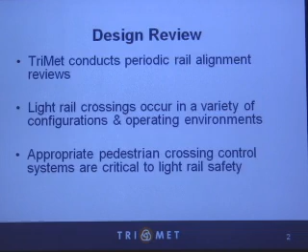And we've also learned quite a bit over the years as to what appears to work and what doesn't appear to work so well. So with that, there are really four design principles that we have to keep in mind. One is to respect the urban environment. What this really means is maintaining the existing travel patterns to the extent possible. So we study that. Secondly, it's to comply with pedestrian and light rail operator expectancies.

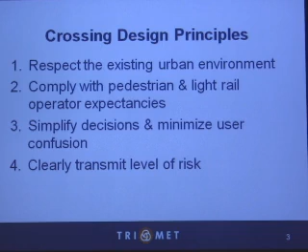What does that mean? That means really assessing what are the pedestrian behaviors, what would we expect them to do, how do we expect them to behave, and then to simplify decisions and minimize user confusion, and then lastly to transmit the level of risk. Is it safe to cross?

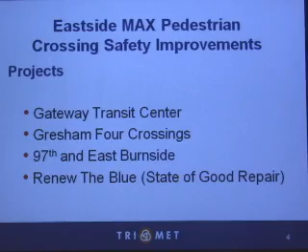With those principles in mind, we looked at four key areas along the east side alignment. We looked at the Gateway Transit Center and Gresham. There are four crossings in Gresham that we looked at. We also looked at 97th and East Burnside. And then as a much larger effort, the Renew the Blue State of Good Repair project.

First, I'd like to give you an overview of the Gateway Transit Center. As you probably know, Gateway is the busiest transit stop that we have within the alignment. It serves about 2.5 million boardings annually. That's because we have multiple bus routes along this line. There are 3 MAX lines that converge at the station. There's a large clinic, a large shopping center just across from the transit center, a very large park and ride. And then there's the ODOT multi-use path along the alignment.

And all of these facilities serve to provide daily travel around the Gateway area. So with that in mind, what improvements were we looking at? First of all, we were looking at channeling pedestrians and cyclists at the Gateway Center into a predictable pathway, improve ADA accessibility, improve pedestrian awareness at crossing locations, provide better cues to identify pedestrian intent at a crossing. This is for the benefit of the rail operators and the bus operators.

And then to improve security by fencing off a very large area where there was quite a bit of trespass into the trackway or across the bus travelways.

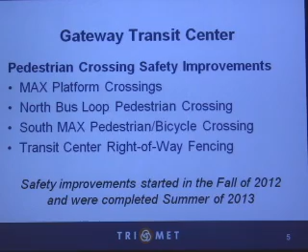So what I will be doing now is providing you with a series of photos, because I think that's really the best way to illustrate what those improvements are. Also, keep in mind that some of these improvements are still underway. We have not completed all of these projects.

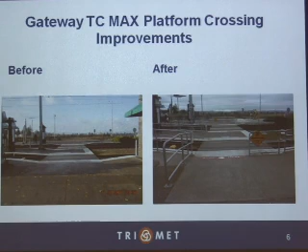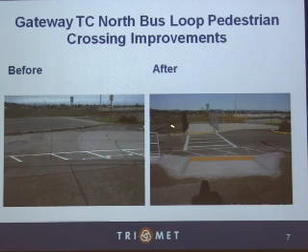Again, the attempt is to try and channel pedestrians and guide them in the direction that we wish them to go. And in this area also, bus traffic is one way. So with this orientation, they would be tending to look to the left, they being the pedestrians.

Public has a question. How long was it like this before it became that? Several years. How many is several?

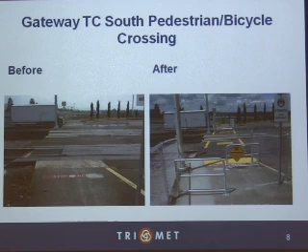point of development. Thank you, appreciate your comment, but maybe you could hold comments till we're done here. I think we've got a public forum where you can ask those questions, all right? Okay. Thank you. But again, those questions, as everybody's here, we address the issue. Understand. So maybe we can open up after this, but let you get through your presentation. Sure. Thanks, I appreciate you letting me interrupt for a minute. Okay.

So now we're looking at another area of the transit center, and here we had an area where buses travel. Oops. The buses would lay over in this area and serve stops, and then travel to the north. What we saw was that many of the passengers would cross into this area because this was considered non-TriMet property, and they would smoke or tend to loiter.

So in cooperation with ODOT, we erected this fence to discourage the movements across this travelway, and I'm happy to report that this has been extremely effective. We do not get very many pedestrians or passengers any longer congregating in this area because of the fence that has been placed here. So we have now discouraged risky behavior crossing in front of buses as they begin to pull away from their stops and go towards the north to exit the transit center.

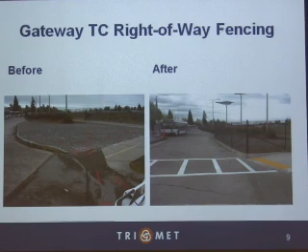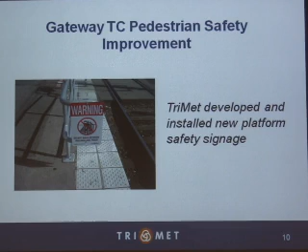One of the unintended consequences that we identified after the improvements were made is that with this pipe railing here, some believed that it was still advantageous to take a shortcut, and you can see there's the crossing in this area here. It was still advantageous to take a shortcut and walk along the tactile warning strip, or worse, into the trackway. So we placed these added signs, which we are now doing at all of our locations where we use this type of pipe railing, including on the west side. That's an overview of the Gateway Transit Center.

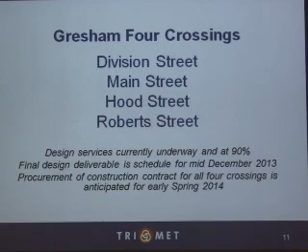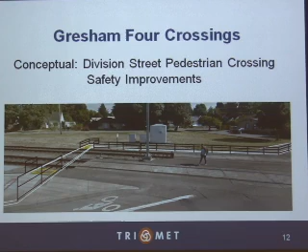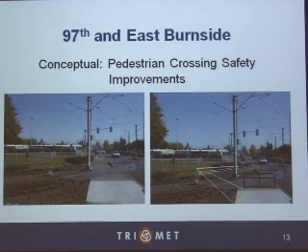And then lastly, as part of our Renew the Blue project, we are looking from Hollywood to 181st, and also the Ruby Junction crossing at 197th, and then Gresham City Hall and Cleveland. All of these locations will also be improved over time. We are including part-time warning devices, pavement delineation, signage, and channelization.

And one last comment, to address the earlier comment that was made. It has taken us 25 years, and we've learned much over those 25 years. Initially, back in 1986, there were a series of assumptions that were made. We're a lot smarter today, so our design criteria have been upgraded substantially. So are we making these improvements as we advance into new projects? The answer is absolutely, because our design criteria have been updated.

And in fact, they continue to be updated. With these very improvements, we've gone back and are now beginning to make other upgrades to our design criteria, understanding that there's still much work to be done. So it's a work in progress. We made improvements on the west side, and these are the improvements that we are intending to make on the east side. And as we learn more about pedestrian behaviors, we'll make even further improvements.

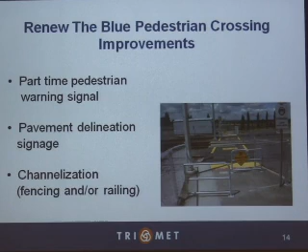Questions or comments from the board? Yeah. Is this standard around the world?